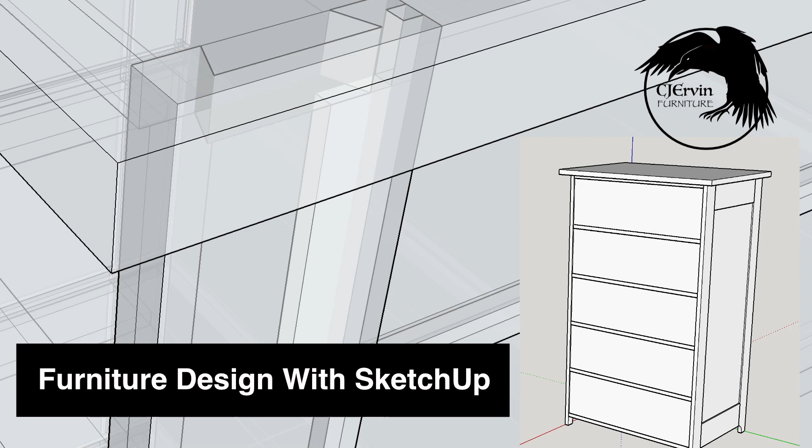So I'm getting ready to build a dresser and I thought I would share with you the design process and draw the dresser from start to finish using SketchUp so that you can see at least my thought process in designing furniture and some of the ways you could use SketchUp to make your designs buildable or to determine if your designs will actually come together. I think it's a great tool for visualization.

But before I go into laying out the dresser or chest of drawers we're going to build, I wanted to talk a little bit about ways you can build it. Firstly, here's my preferred method, where you have legs that go all the way up. They form the core structure of the carcass. In between the legs is a panel and frame assembly, and typically there's either two raised panels or one sometimes, or two flat panels. This is the 90 percentile where I go for my design. It's tried and true. It's all really strong, and it works equally well for less ornate pieces. Here it is without a raised panel.

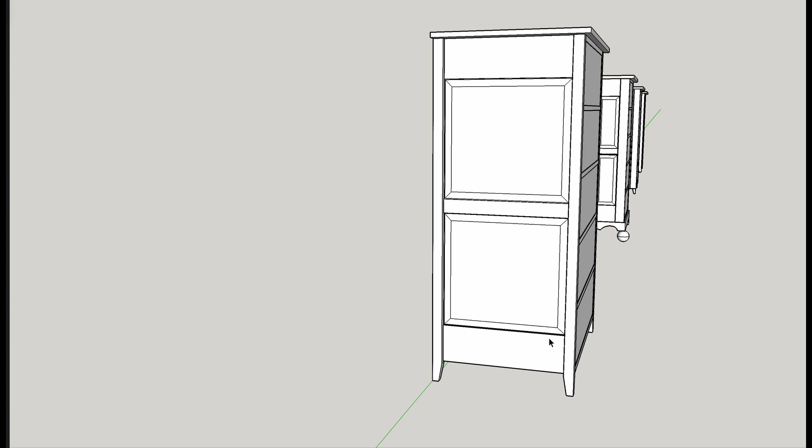Great product, great structure. Ultimately, you can also ditch the stiles. If you've got the legs that go all the way up, you can say, no, I don't need the stiles, it's wasted work. So here, the rails for the panel and frame, the legs become the stiles instead of an extension of the stiles. And it works equally well for an ornate sort of look. And you saw some of this in the later arts and crafts or mission style work where they adopted the leg as stile.

Alternatively, you can just say, I'm going to go with no legs and all stile. Now in this Gothic look, you've got to build a base. It's got to sit on something. There's got to be something to get it up off the ground. And forgive my little frou-frou here, I just threw that in so you would recognize that style. We've all seen pieces that are very similar that use the base because they've gotten rid of the legs as stiles or stile extensions. Now it doesn't have to be ornate. You can do this in a more subdued way where you've got a very minor leg, but it's still a more ornate look.

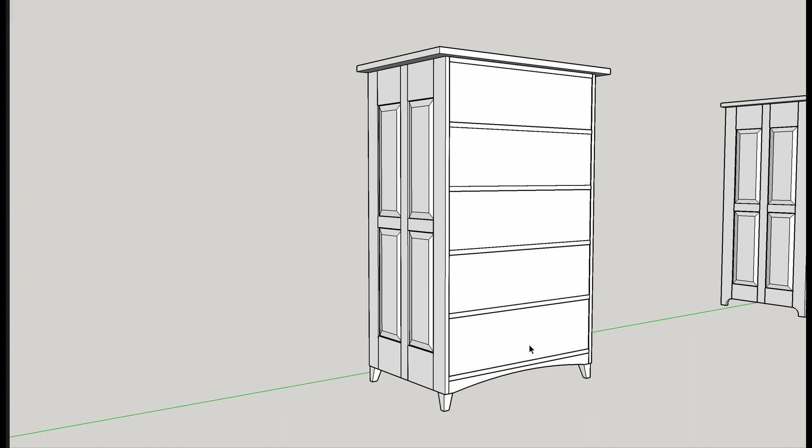Now, alternatively, the Art Deco folks came along and said, we don't need a base, we don't need legs as part of the stiles. We can simply have legs attached to the casework. And so what you'll see here, I'm going to turn this upside down a little bit, is they simply extend the stiles. And they extend the stiles and the bottom rail to form a bit of an apron where you can then get a leg anchored securely and it butts up against a drawer web. Not a bad way of doing it, and it's also effective in a very plain look.

Me personally, if you're going to go that minimalistic, you can sort of go back to the stile becomes the leg, and that's also very simplistic. It's also easy to build. It doesn't look as good in an ornate setting, but look at it in a simple setting, and now you have sort of the classic mission or arts and crafts look. And this was the sort of beginning way, I guess, that Stickley and competitors built their furniture. They just said, hey, it's a simple design. We'll take the stiles all the way down.

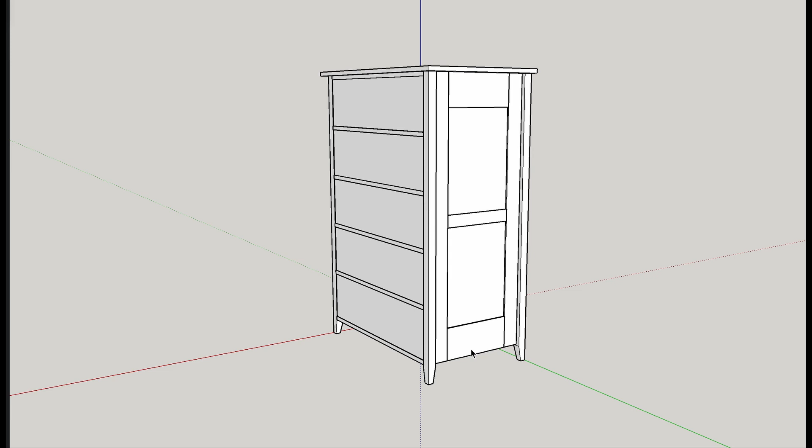Now, why would you choose one of these over the other? Well, a lot of it depends on what you're trying to do or the rest of the pieces. I mean, if you've got a curved front, if you are wanting to elevate the piece, a lot of design decisions come down to what is your artistic flair and what the wood is. Now, in my case, if I was using something like white oak, which is really one of my favorite species, I would really go with something like this because there's enough complexity in the piece that it's going to balance with the very micro complexity of the white oak, and it's going to be very harmonious.

If you're using something that is really simple like cherry with limited complexity in the wood, or maple, you can go really ornate so that you're not over competing with the wood. Now in my case, I'm going to use the gum that I used for the entry table project, and that wood is about as busy as I've ever seen. It goes from vanilla to cinnamon to rust, to chocolate and everything in between. So any of these other ways of building would compete with that wood.

So I'm going to use the stiles-become-legs method, and I'm going to use a single panel, which means I'm going to use a very large rail to give this panel structure. You could draw it split, you could do anything that suits you, but we're going to draw this particular piece of casework together, or at least I'm going to draw it, and hopefully you can watch. And I'm actually going to go as far as to draw all the joinery so you can see what the joinery looks like in a piece of casework like this. So let's get on to drawing.

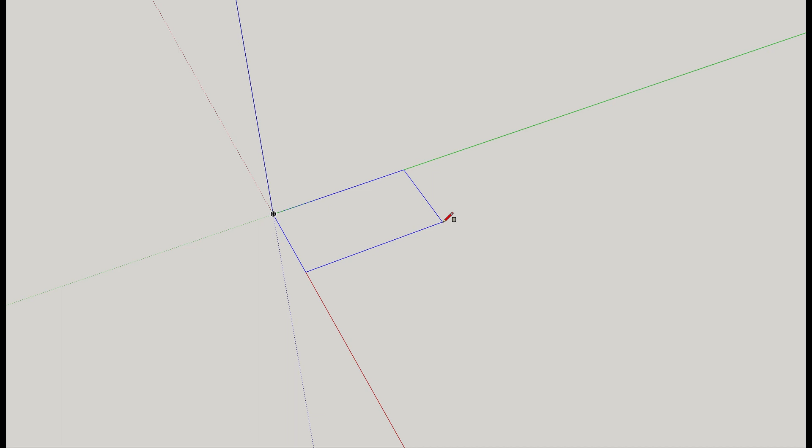I like to start with a bounding box. It's just a shape that represents the top and the bottom. In this case, I'm going to do a piece of casework that's 22 inches deep by 30 inches wide. So 22, 30 gives me a box that is the bottom. I'll make that a group so it doesn't stick to anything. And I'll use move with option to make a copy that is 54 inches tall, because that's how high I want to make the casework. So now we have two planes that represent the size that we want to make our casework.

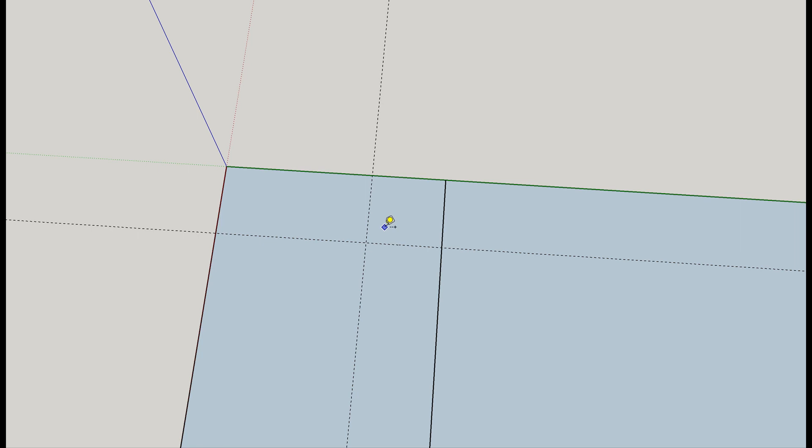So the first thing I like to make in terms of a real drawing item is the stiles. So we'll come into the corner, we'll draw our stile, and we'll make it a 3-inch stile by 3/4 inches. Now if we look into our stile, we need a cutout in the back for our plywood back if you use it. Easy way to do that is we'll get the tape tool, we'll come in a 1/4 inch, we'll come in a 1/4 inch, and that shows us the size of the notch, so we'll draw that in. That means we don't need these lines.

And we can extrude that on up. So we'll select it, we'll push pull, and we'll push it 54 inches up to the top, because we know that's the top because we moved it up that high. So our first stile is ready. Now we need to go ahead and decide how high we're going to make the rail, because the rail is above the bottom, leaves us room. So using the tape measure, we'll come up 2 inches and strike a line. That way we've got a point to go ahead and make our arc.

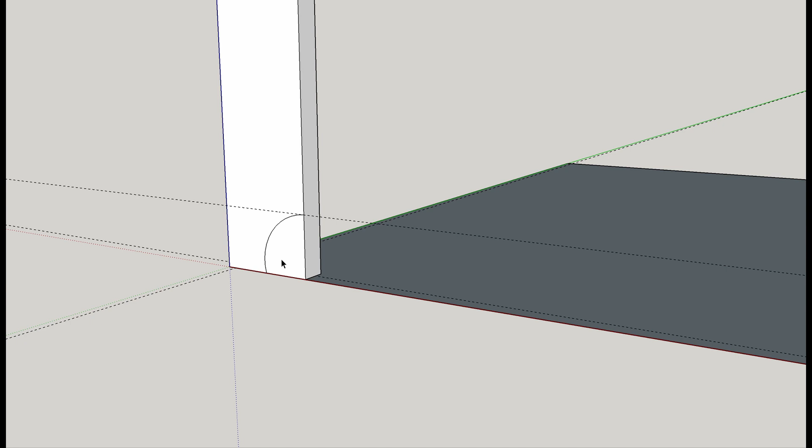Now to make the arc, there's several arc tools. This is the one that I prefer. You pick your top point, you pick your bottom point. I'll wait for the tangent, and I'll wait for the tangent. So now we've got an arc, and we can use push-pull to get rid of that. So we have one stile. Now we do need a groove along this edge. Now we can't cut that groove through because it'll stop when it hits this arc. And we don't want it to go all the way through anyway.

So I'm going to come up a 1/4 inch. That's a 1/4. I'm going to come in a 1/4, in a 1/4, and I'm going to draw that rectangle the whole way through. I'll go all the way through the top. I've got to do a lot of moving around. We'll go to right there. We'll use a push-pull. We'll push that in, again, 1/4 inch so that we have our slot for our panel. That looks good. Now let's get rid of the guides for the time being.

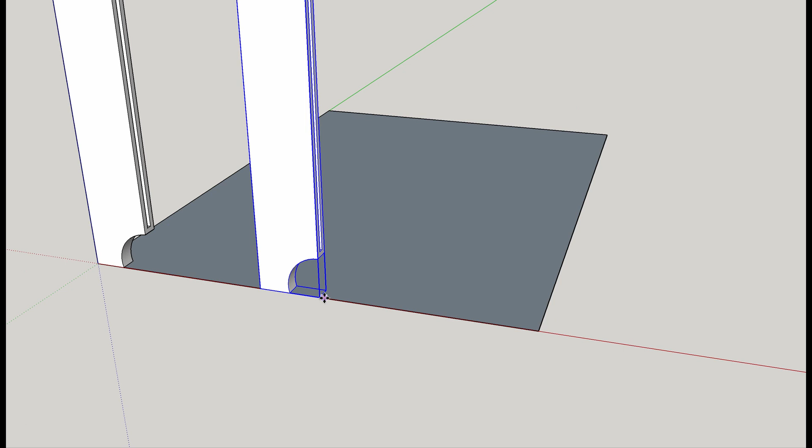We'll select all of that, make it a group. And now I'm going to move it with Option to copy on this edge. Of course, you can't see what I'm doing. Let's get back in here. I'm going to move it to that edge. And I went a little far. All right, let me get that corner. There we go. Now it's facing the wrong way, but while we have the Move tool selected, we can come up here, rotate it 90 degrees, and we'll pop down to the bottom and make sure it's aligned correctly. And it isn't.

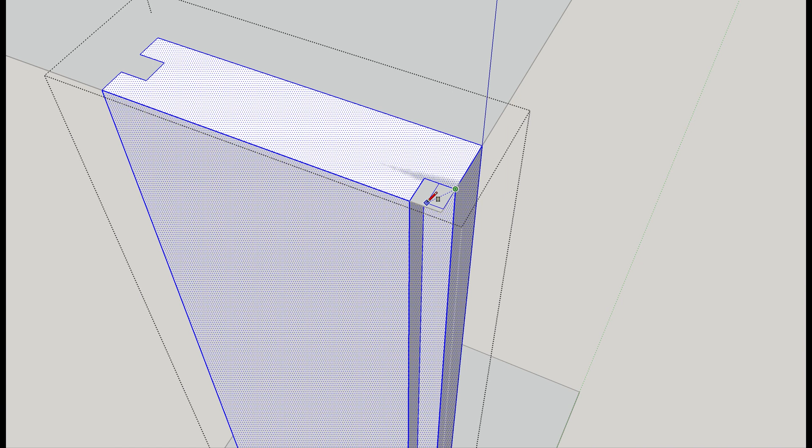Now we don't need the slot in the front. Should have left that in until I got it done, but that's okay. We'll close it in. And we'll just close it in with the push-pull tool. Whee! That takes care of that. Now we've got some extraneous geometry that leaves. And we don't like extraneous geometry.

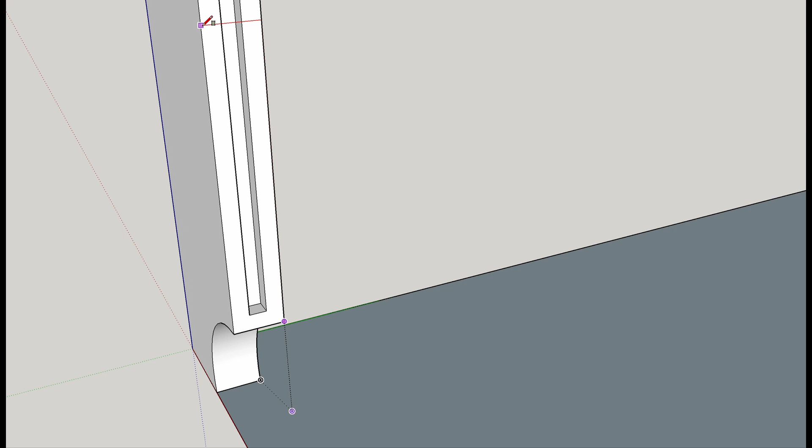So now we have two stiles, and let's go ahead and put in a rail. A rail is simply a rectangle drawn on the face, and I like a 5-inch rail. On big panels, I like thicker rails than stiles because you need the tenon and glue surface. So we'll make this 5 by 3/4, and we can push it across to that surface there. I'll put the slot in it before I copy it. So another rectangle, and we've already got the points here. That one.

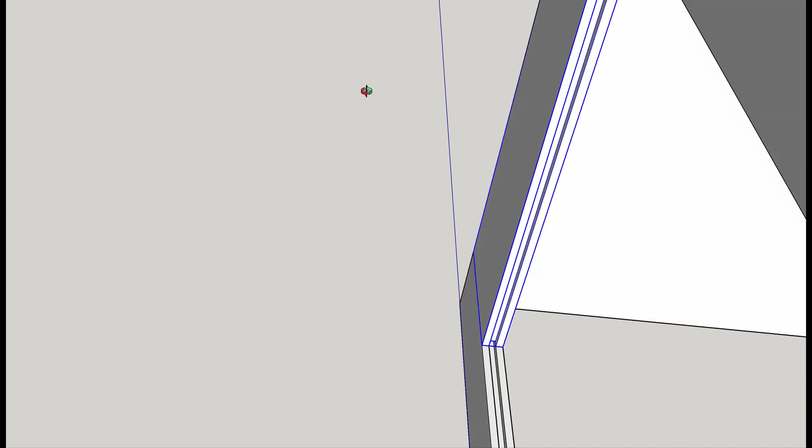Over to here. Push pull, go down 1/4 inch. Make this a group. Now we'll move it up. Option to copy. Sure I'm at the corner. That's it. Now it is upside down. We could rotate it, but we'll simply select it and do flip along the blue. So what that did is it moved the slot to the bottom.

All right, now we need a panel. And the panel is the size of this opening plus 1/4 inch on each side. The easiest way to draw that is going to be to hide the two stiles, and we'll draw another rectangle using the rail as a guide. Right there, and we'll do push-pull. And before we drag it all the way up, we know the sides need to come out a 1/4 inch to fit inside the stiles, so 1/4. And we'll do the same thing on the other side.

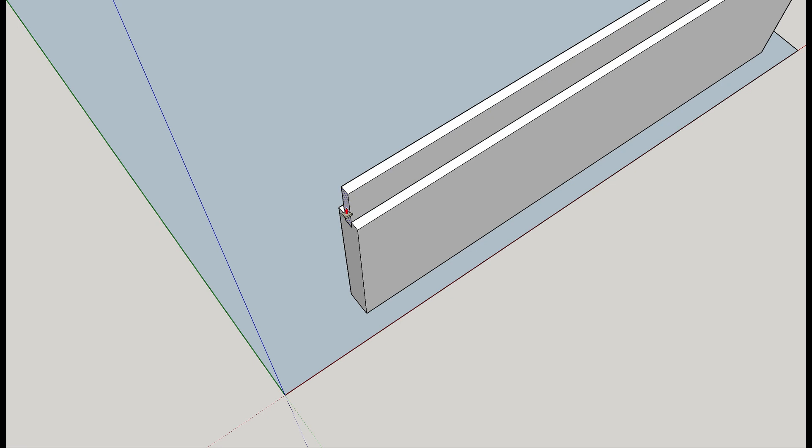There, now we'll view hidden geometry, and we'll unhide. Now we can pull this thing all the way up. Got to keep moving around. Now we need to take it to this point and then a 1/4 inch more. So we'll hide this and we'll come in here, select 1/4 inch, and that takes it inside that slot. And we'll unhide. So in very short order, we have a panel,

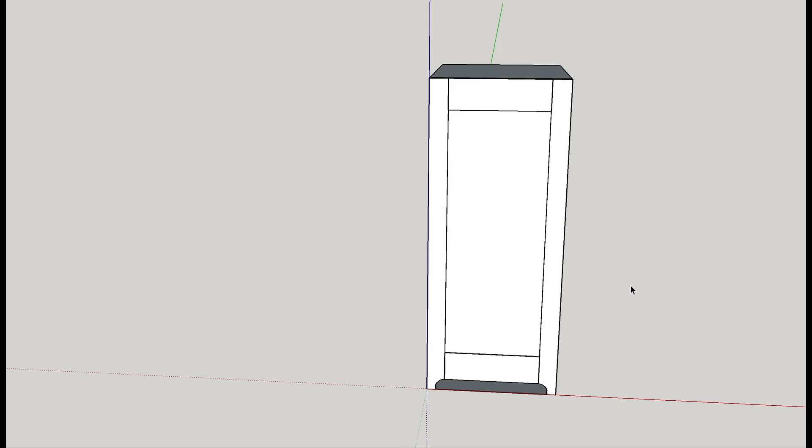and I'm going to make a group out of the center. Then I'm going to select it all, shift, shift, make sure I've got the center panel, and I'm going to make it a component, and we'll call it side. Now I'm going to use the move tool again to move a copy over. So M for move, option for copy. I'm going to drag the inside to become the outside.

Now we have a problem if we start drawing on it now, in that this outside is this inside. So we need to turn this one inside out. We can do that by flip on green. You see the green axis running along here, so we're going to flip it on the green. So now we have flipped it to where we've got inside to inside, outside is on the outside. So when we start drawing joinery on this inside, it will show up over here. Now we don't need these anymore because we've now established our own bounding box.

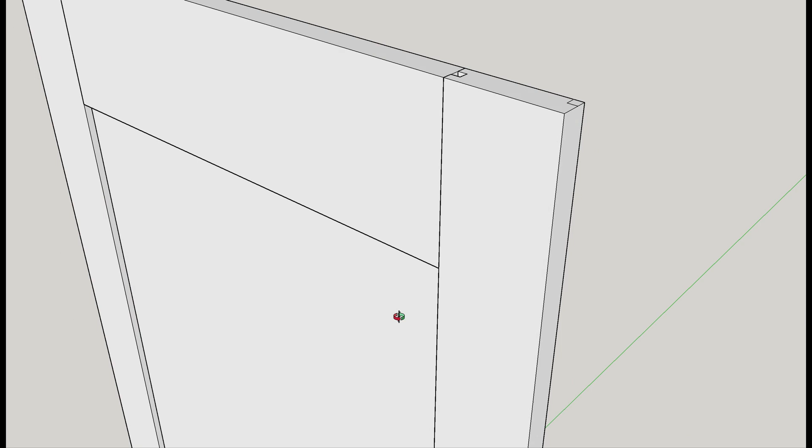So it's time to draw some drawer webs, and to do that we've got to determine how far they come. You could make them flush. I like the shadow line that is made by having them set back a small amount. And so, got a little bit of stray geometry here still. I didn't clean up the top. Take care of that. Anyway, on drawer webs, I set mine back 1/8 of an inch. So I'll go ahead and mark 1/8 of an inch, and I'll turn on guides so we can see that. So that's where our drawer web will end on the front, and on the back, the drawer web will end flush with where the plywood back mounts.

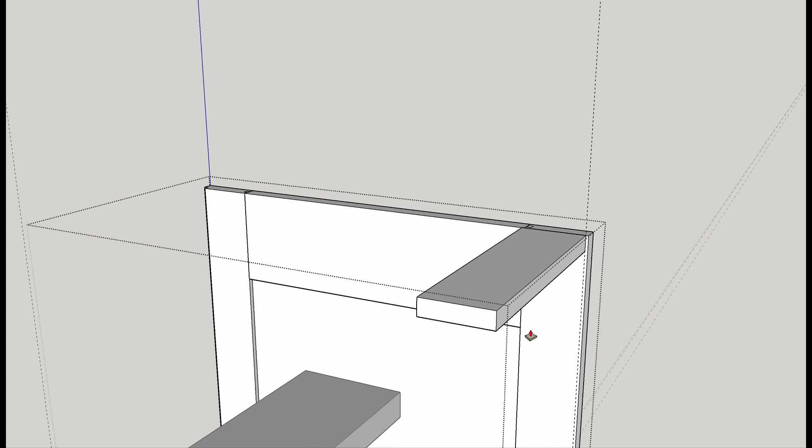So a drawer web starts its life as a rectangle on a face, and it's on the front. And I will go 3 inches by 3/4. Now I can pull that across. Hold on, I was editing that component, and I don't want to be. Now we're back to where we want to be. Rectangle. 3 by 3/4. Pull it across to this face right here. There we go. Let's get back in the middle where you can see; it's very hard to draw with this very small window that screen recording gives you.

We'll make that a group,

And there's Django. Every video.

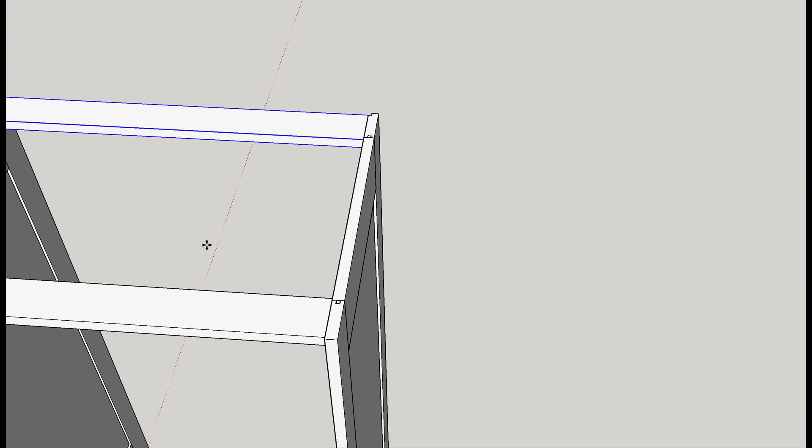I'm going to turn off guides, and I'm going to move, Option, grab the corner, and go to right there. All right, now we will draw the other one. So rectangle, and again that's 3 by 3/4. Oh, did it wrong. There we go. We'll push this out. Make it a group.

Move, Option to copy. Grab the inside face. It becomes the outside. So now we have an 1/8 inch reveal on the drawer web and a 1/4 inch reveal on the back for the plywood. Looks good. Now let's make all of this a component.

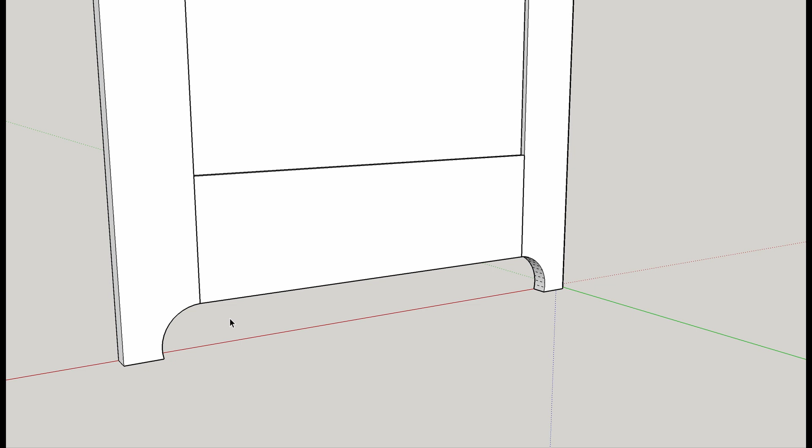And we need to copy them down as far as we dare, so let's get a line set up for us. Tape, we'll go right there and show guides. So we will copy it down to that intersection of our reveal and our level line with the rail. So move, Option copy, grab the bottom, right there. Click, and I'll do /5 on the keyboard. And unless I mess up, that should give me 5 of them, equally spaced.

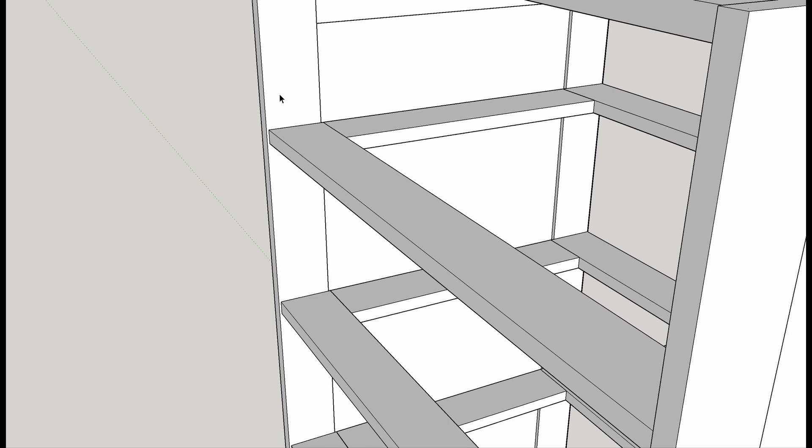So that takes care of the drawer webs. Turn off the guides. And now we'll draw some drawers. All right, drawers are pretty simple boxes, especially since we've already laid out what we want. We'll turn on guides, and we have our existing 1/8 inch reveal. So we'll come back another 1/8 inch for a 1/4 total. And that'll give us a point where our drawer stops.

When I get to where we can see the inside face. There we go. And we'll put a rectangle in here. Oh, didn't quite get it right. There we go. We'll draw it up, and our drawer faces will make 3/4 inch stock. Let's see, 3/4. Can't type today. Okay, so there's our drawer face. Push pull. We'll come back to that surface right there. And now that we have a drawer face, we'll make it a group. And we've got to draw the back before we can join them.

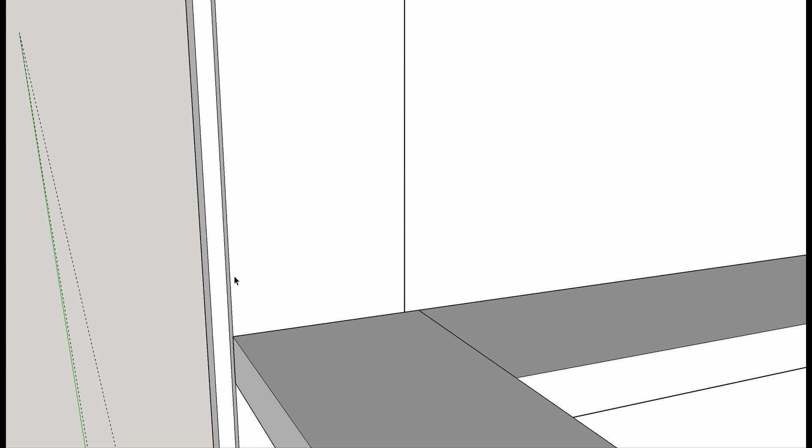The back, I don't like drawers pressed firm against the back, so I'll come up 1/4 again and do a rectangle. Back and sides, I make 1/2 inch, so 1/2 size. I'll pull this out. Get stuck in the model periodically, but that's okay. I went too far. We want to land right on that guy. There we go. I'll make him a group.

Now we got to draw the sides, and since we know where the top is, we can go ahead and hide the... I'll turn off the guides, make it easy to see. Sides are just another rectangle. It helps to select the plane you want to be on, rectangle. Again, we'll make them 1/2 inch stock. And we'll do push-pull. And we'll push it back to this side here. And we'll make it a group. And we will move it using Option to copy over to this side.

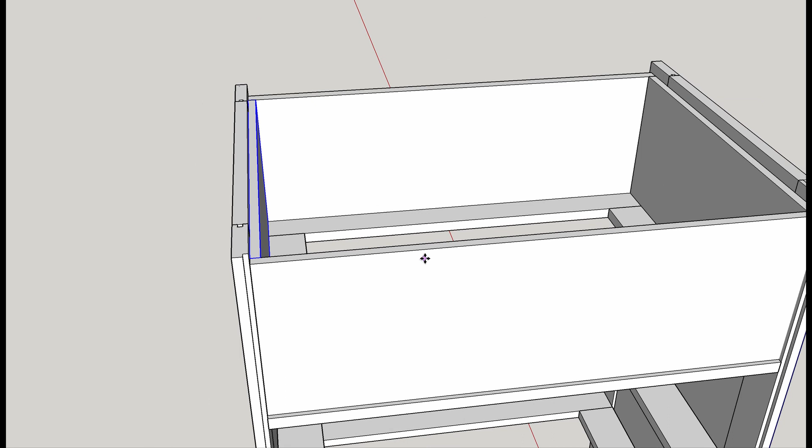Now we ought to put a bottom in, and to do that I will make it to where we can see what we're doing here. Let's hide this guy. That was the back, so we'll come in and view guides. 1/4 inch, 1/4 inch, so it's 1/4 inch up, 1/4 inch bottom. But let's go ahead and cut it out first. So to cut it, we'll go ahead and hide the side. So there's our mark. And we'll make a rectangle here to cut out.

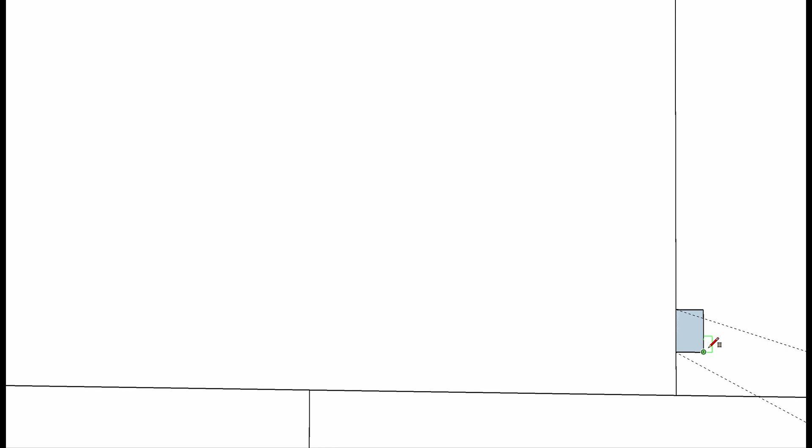We do push-pull. Actually, nope, can't do that. I've got to be editing that component. And I'll hit it so it inferences. And just to double check, I'll do a tape for 1/4 inch, because I don't think it did it right. That's better. Get rid of that.

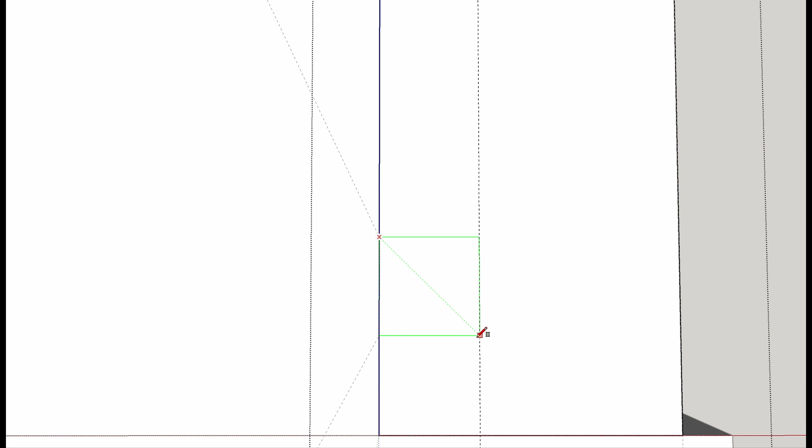That's better. Push-pull. Now this will be hard to do, but we'll push it in and we'll come get it from the other side. Actually, we can do it easier by hiding him. And him. And away we go. So he's done. And we'll view hidden items, and we'll unhide the drawer side.

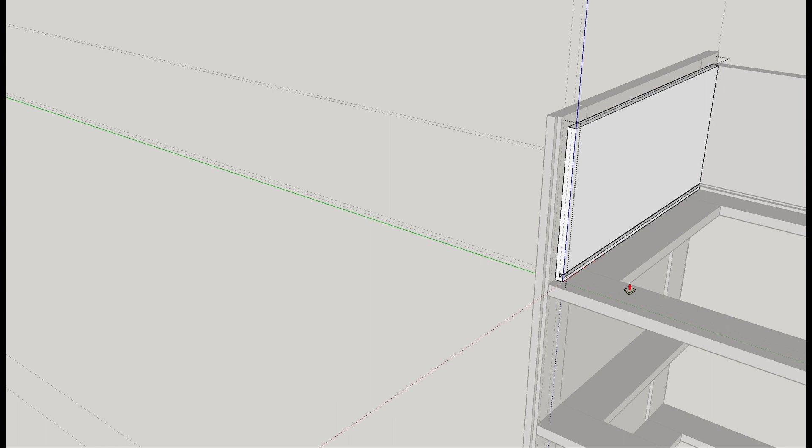And we'll do the same thing. So tape, 1/4, 1/4, 1/4. I'm going to edit, rectangle, push-pull. There, he's gone. All right, now we can simply reuse him. We'll view hidden. We'll unhide. Unhide. So we made a groove on the front and the one side. So we'll just delete him.

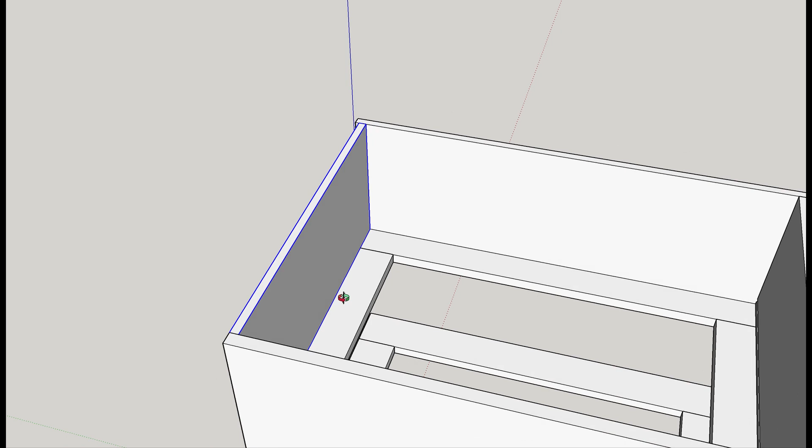And we'll move him over since he's got a groove on him. And there's the front. Turn off guides. So he's got a groove on the wrong side, but that's not a big deal. We'll take him and flip him along the green axis. So now his groove's on the right side. And we can do the same thing for the back. Delete. Grab him, move, Option, take the outside face and put it in. And this is the red axis, so flip along red axis. That groove comes in.

Now the one thing we do need to do is shorten this. We copied a 3/4 inch piece, and it's 1/2 inch for the back and the side, so we'll shorten it. Oops, I'm sorry, it should have been 1/4. Can't type tonight. All right, so there is a drawer. Now before we get too far afield, let's go ahead and make a bottom.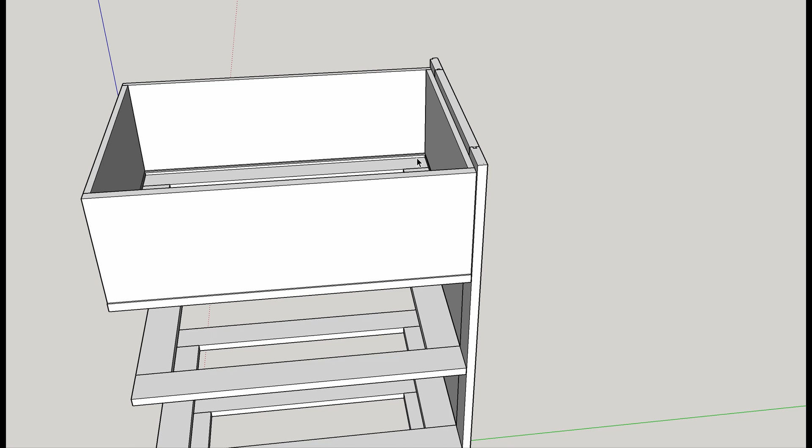Easiest way to do that, I will hide... we'll just use this trough as a guide. Make a rectangle. I want to be sure I get in, can't go too far. Push, pull. There we go. Now I need to bring these sides out 1/4 to fit in the groove on the front and back. And zoom out. 1/4. And now I'll bring him all the way across to mate with his partner on the other side. So he's in the slot.

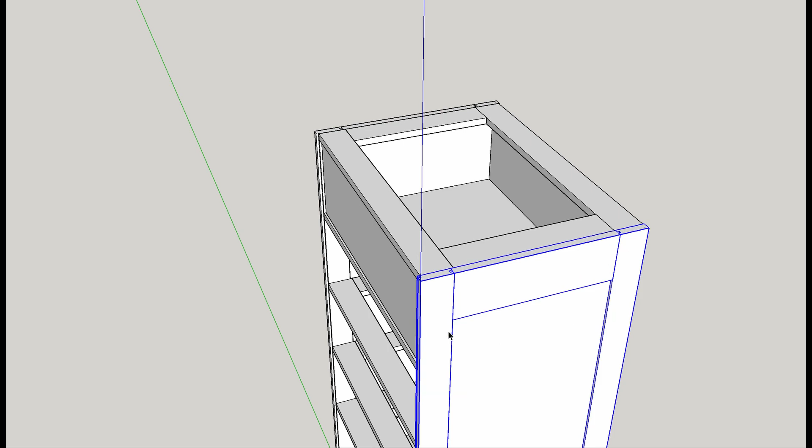And we will now unhide the other parts of the drawer. Might as well unhide the web and unhide the other side. So now we have a drawer that is functionally correct. We'll make a group out of the bottom. And we will select all parts of the drawer, and we'll make a component.

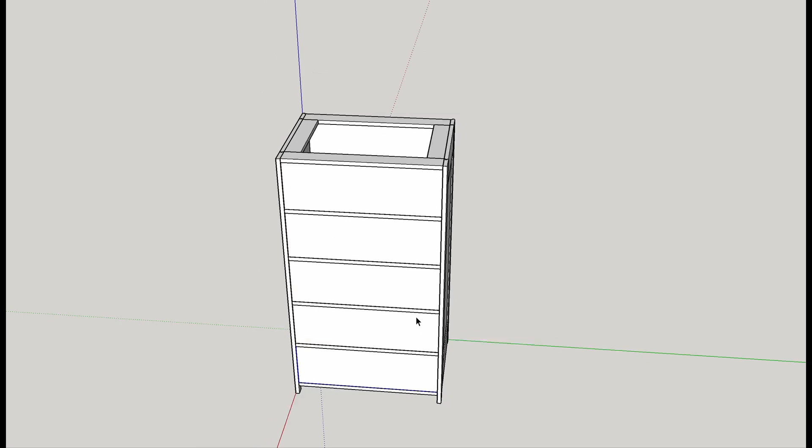Now we need to make more of them, so we'll use move, option, grab the corner, and we'll come down, and I'm going to hold down the blue, and then I'll do /4. So that's 4 drawers. Get where we can see. So we have 4 drawers, 5 drawer webs, 2 sides.

Next thing we need is a top, and then we can draw some joinery. Top's easy, it's a rectangle. Just go corner to corner. I'm going to pull it up 1 inch. Now we have to give ourselves an overhang, so I'm going to go 1 inch, and I'll make the top a group. So that is the functional point of the chest of drawers.

Now, if I were building it, I would stop here because that's enough for me to sort of take it and run with it, because most of the joinery I do on the fly and say, okay, I'm making this, I need to make it bigger. But let's go ahead and draw it so we can actually see what it's like and how you can do some joinery with SketchUp. Now, I will say there's a couple different tools that I'm going to use, some of which you may not have, may not want, but I'm going to show you a workaround where you can do it manually. So we're going to do joinery.

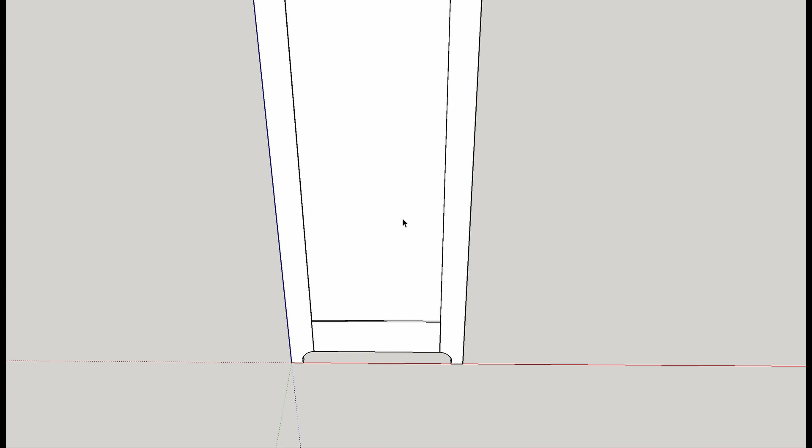For the sake of what we're going to do, we don't need the drawers or the top, so we'll hide those because all our joinery is going to be restricted to the casework. Now, I should forewarn you, when we're doing the joinery, I'll probably end up deleting a lot of pieces that we made, because if I put the joinery into this rail, I'll simply be able to copy it down to the bottom rail and then flip it. We did need to draw it in place earlier, so we got all the positioning of everything we needed.

We'll start with an easy bit, which are the horizontal dovetails that hold the top drawer web in place. Before we do that, though, since this top drawer web is different than all the others that have either sliding dovetails or stopped dados, we'll make this one unique so that our work that we do on this one isn't reproduced to all the others. So the first thing we'll do is we'll give ourselves a margin to go by. We'll go in 1/4 inch. I better turn guides back on.

And we will get to where we are working on this piece, and we'll decide what we want as a dovetail, and we'll just draw it in with a line. Again, this is not a show joint, it's a structure joint. So we want to stay far enough away from this edge that we don't run the risk of cracking it. So we'll come in that far, and we'll go something like that. And then the same can be said for this haunch tenon. We'll come in this far, look for a similar angle, and then we'll connect them. And that works. Not symmetrical, but it'll hold it in.

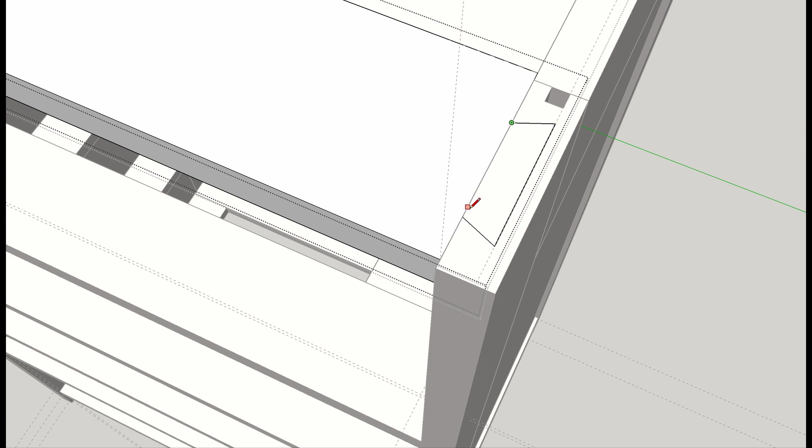Now this piece, we will go ahead and make a copy of it for the other side for now. And it's on, but we need to flip it. So we will flip it along the green axis, I believe. And now we'll move it over. Of course, it's not happy. And we'll get it in the right place. And we'll delete one we had to leave behind to make it work. Oh no, Command Z, Control Z.

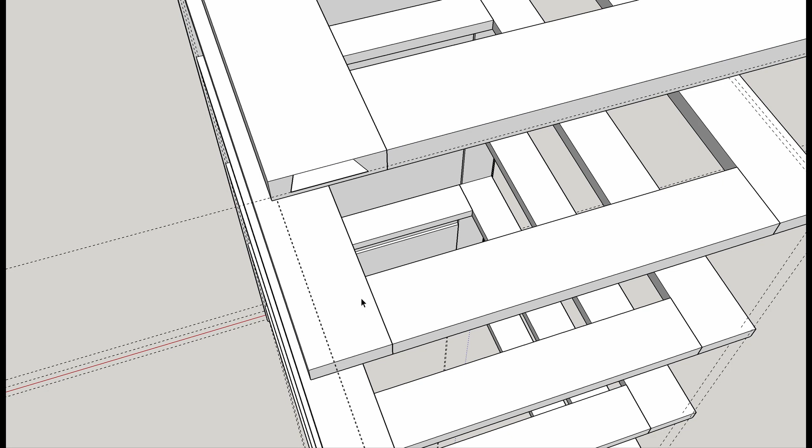So the next step is to extrude that dovetail, and we can easily do that by hiding the panel, and I gotta rotate it, so we just extrude it. I got to get back in the right context. Down to here. And we'll go look at the other side. We'll hide that. And we'll extrude that. And we'll get rid of the extraneous line.

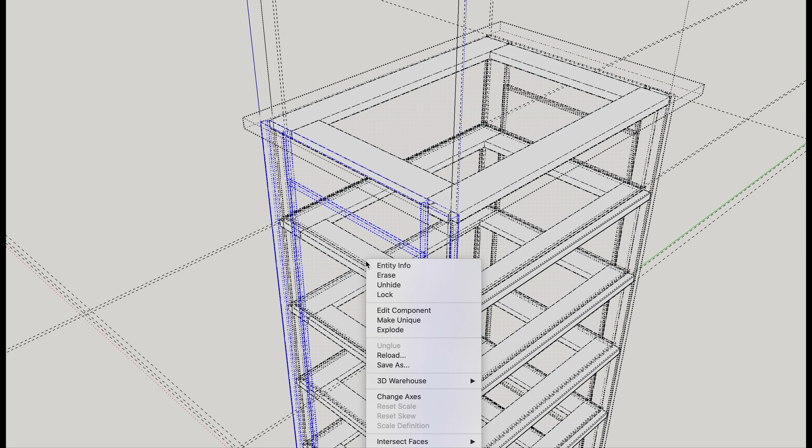So now we've drawn our dovetail portion, and we'll view our hidden items. And we'll unhide. And we'll unhide. We'll turn off guides for the time being. All right, so we've drawn the dovetail, and now we need to cut the stile to make it fit. Now I'll show you the manual way. The manual way is we select the element, we go into edit mode, and we'll just trace it.

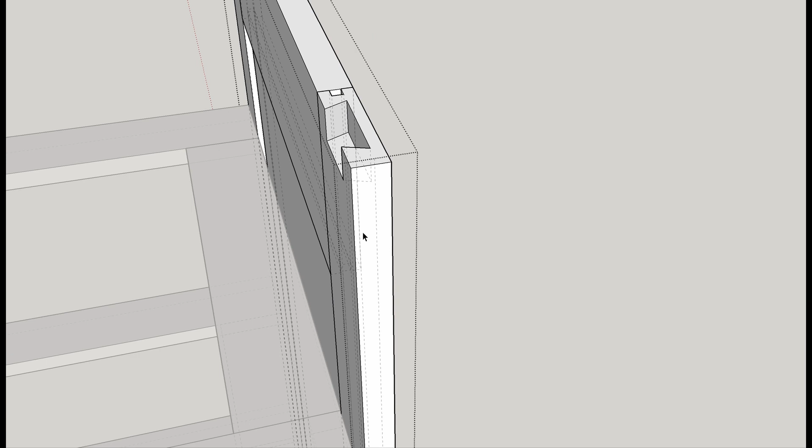Now we'll hide this. And we know our stock is 3/4, so we can just push it down 3/4 of an inch. And now we'll find out if I positioned the other one correctly, and I don't think I did. So we did the cutout. Let's view our hidden. And unhide. No, I did get it right. Good, spot on.

Now how do you know that worked? Well, take a look at X-ray mode. So we have our joinery in. We are well away from where that haunch tenon is going to come. That looks good. So let's leave X-ray mode.

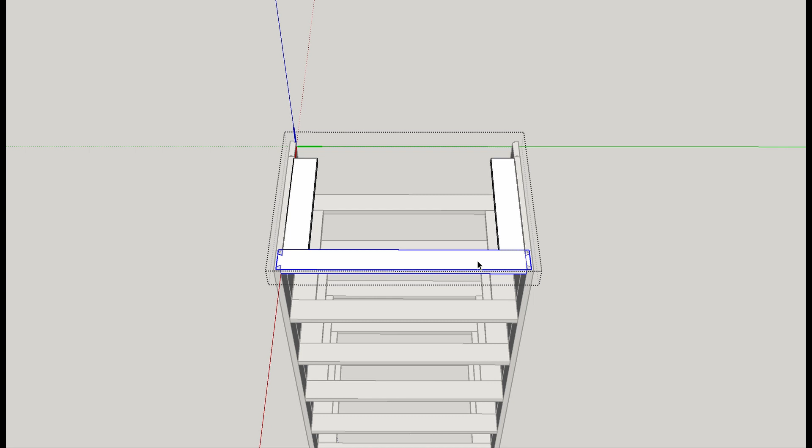Now we need to do the same thing on the back of the drawer web, and here's where we'll cheat. Since we've already drawn this one, we'll go into this item, we'll delete that, we'll take this one, move, option to copy, we'll drag the inside face over here, and now we'll simply evaluate how we want to change it. Well, it looks like we didn't get much from the move. If we do it here, we're really too close to where this haunch tenon is going to come up. Oh well, nothing ventured, nothing gained. So we'll go ahead and undo that.

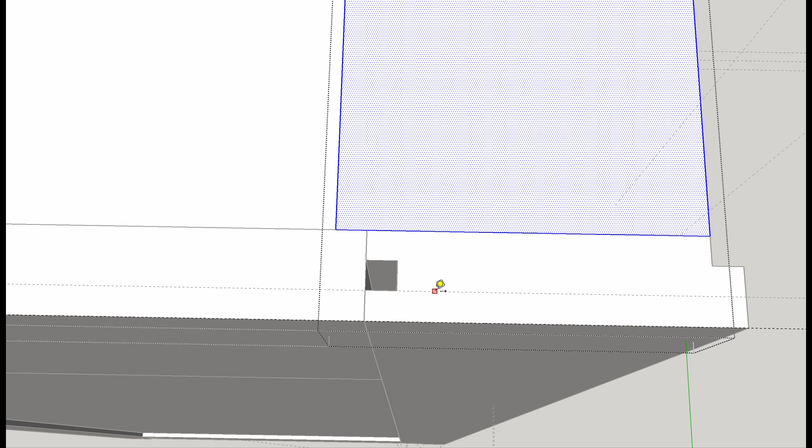So we'll draw a different one here. We'll get into the context of editing that one. We'll get a line, and we'll come well away from the haunch tenon. So I need a tape. Come over 3/4 of an inch, so that looks fine. And we'll come well away from the slide. And that works. So we can hide this side. Same thing, we will extrude it with push-pull. Got to get into the context.

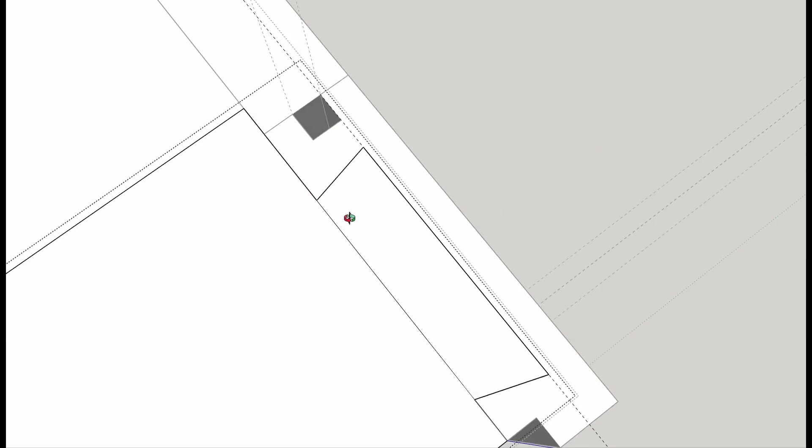And we'll do the other side. No sense copying it. I think it takes more keystrokes to copy it. We'll just draw what we want here. Grab our line tool. We do need a tape. We want to go out a 1/2 inch, come well away from the haunch, come in, come well away from the end and come in. We'll connect them. And now we'll hide the side. And we'll extrude this down. So that gives us both. We got an extraneous line. Get rid of that. We'll get rid of that.

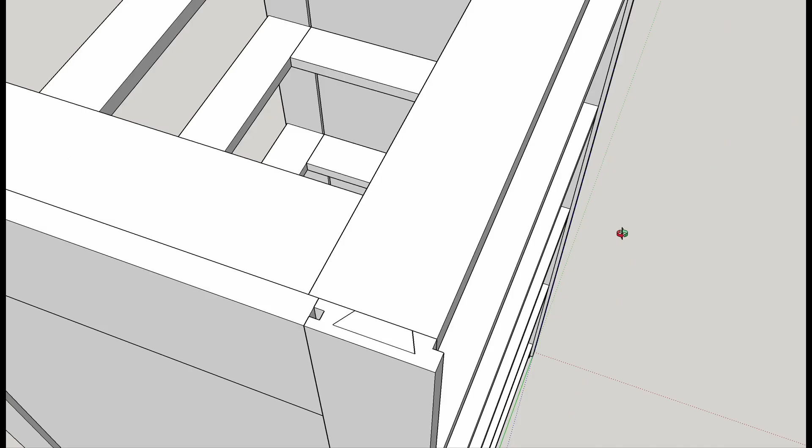Now we'll make the offsetting cuts in our sides. So we'll show our hidden, unhide, unhide, and don't show our hidden anymore, and we'll turn off guides so we can see what we're doing. Now it was the back we already cut, so now we've got to work on the front. So I'll get into edit mode for this piece, and I'm going to trace what we need to cut. I'm going to do the same thing for the other side. Well, that should already be drawn. I think it was the back we already did. Yeah, this is one we haven't done.

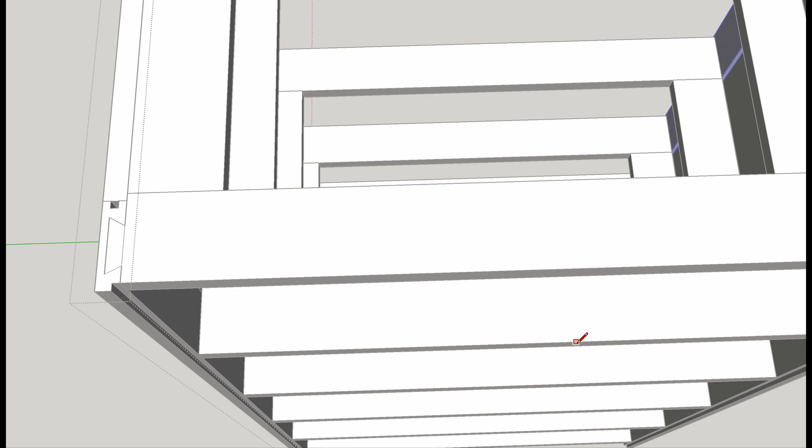And I was mistaken to have copied it, because it needs to be identical, because when we make the cut, it's going to cut them both. So what we'll do is we'll get rid of this one. Let's make sure this is the one that we need to get rid of. Yep, we haven't cut this one yet. So I'll get rid of him, or at least hide him, and I'll undo this one. That's perfect. It's so hard to keep this in the view that you all can see. Get rid of him, and we'll grab the eraser tool.

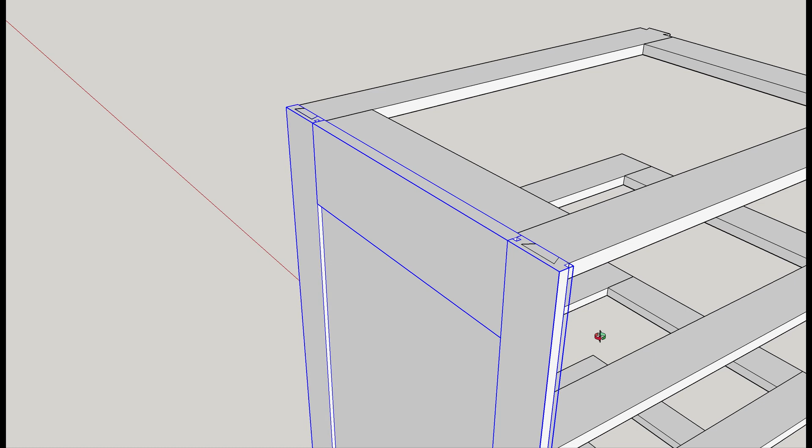Perfect. Now why do we do that? Well, when we cut this side of the stile, it's going to cut the other side, and then we'll simply make the dovetail to match the cut we make, because they have to be identical. And speaking of that, we'll go ahead and draw it. And that works. Hide that. And we can push this down if we get in edit mode, 3/4 of an inch. And that should have done the other side as well. Let me get rid of this line we put when we weren't in the right context. Now if we view hidden, select the other side, unhide, we now have the cut on the other side, which is why we had to undo it.

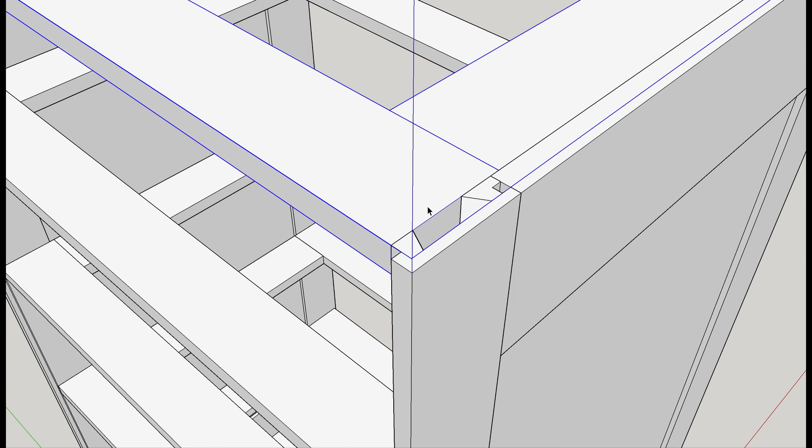So let's put our drawer web back in. Now if we go into edit mode, we're going to do the reverse. We'll go into edit mode for him, and we'll trace the hole. And now we'll simply extrude that. Hide. Go to edit mode.

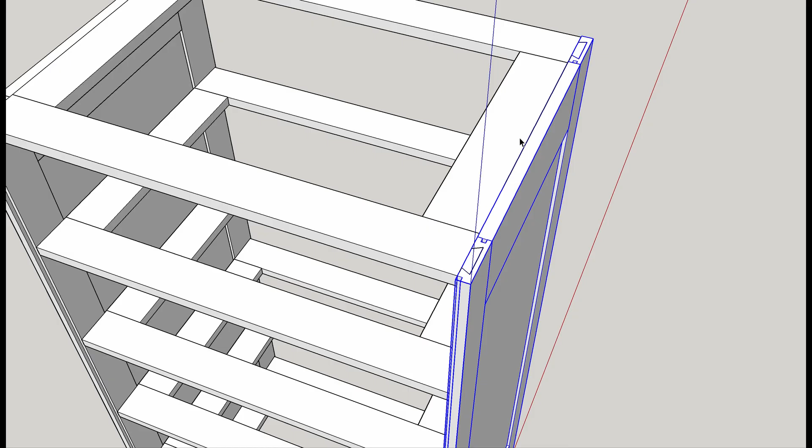And we'll pull it down. And we'll get rid of our extraneous geometry. All right, view hidden. Get our side panel. So that does all of the top web joinery.

Now we'll tackle the lower webs, and it will go a lot faster because they are all identical, and we will be able to gang process all of them just by working on one. And then we will tackle the haunched mortise and tenon in the stile and rail right there.

With the stop dados, the bottom 5 web frames are all identical, so we really only have to draw one. You could do this with a through dovetail that would be very similar to here, except rotated and coming forward. But let's go ahead and hide a side, and we'll draw the elements that we need. Now this is the side with the dado for the back, so this is the back.

For the back, it doesn't matter, there is no stop, so the whole thing has to be able to slide in. So the back is all the way through. So we'll go ahead and pick one at random and edit it, and we'll pull this out 1/4 inch. And so that will be what sits in the dado slot that is cut in the rear stile. And now they all got pulled out just fine.

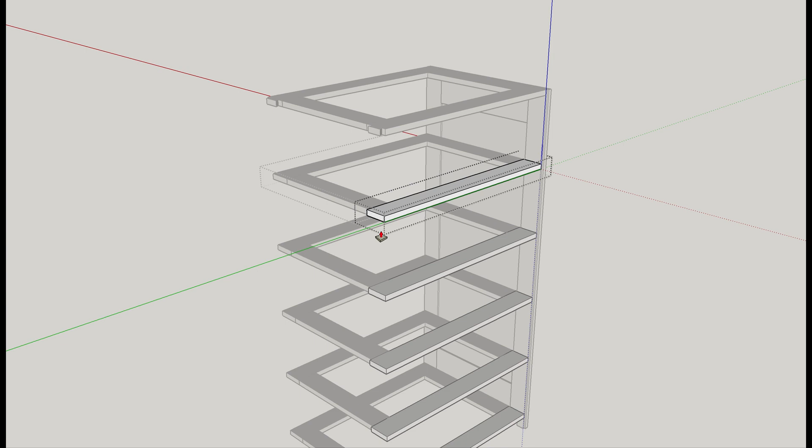The fronts, however, have a stop dado, doesn't go all the way through, so we need to make a mark, and we'll go 1/4 inch, and I'll turn on guides. So we'll need a line, and we'll pull this out 1/4 inch. So now this dado will stop before it hits the face.

Now we can't go deeper than 1/4 inch because if you remember, we've got a 3/4 inch stock for the stiles and rails and a 1/4 inch panel. Even if it's a raised panel, it would still only have 1/4 inch of space on the inside, and to be able to slide it through then, that's as far as we can make it come out. That takes care of one side. We'll go take care of the other side.

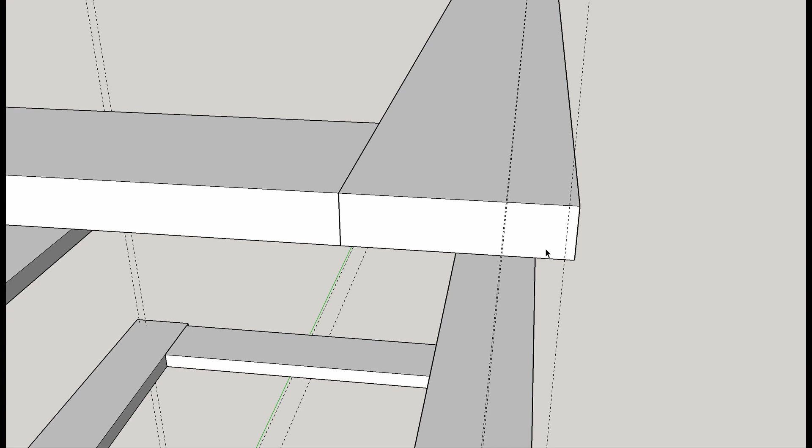We'll hide that. Won't have much model left before too long. And let's be sure we get it right. This is the front. So we'll come here with tape. Let's get in the context first. We'll come back 1/4 inch. We'll draw a line. Went too far. And we'll push-pull this 1/4 inch.

And the back is easy. We just have to get into context and push-pull it 1/4 inch. So that is ultimately our finished drawer frames. Now let's put our sides back on. We'll view hidden, select that, unhide, select that side, unhide, unview hidden, and get rid of the guides.

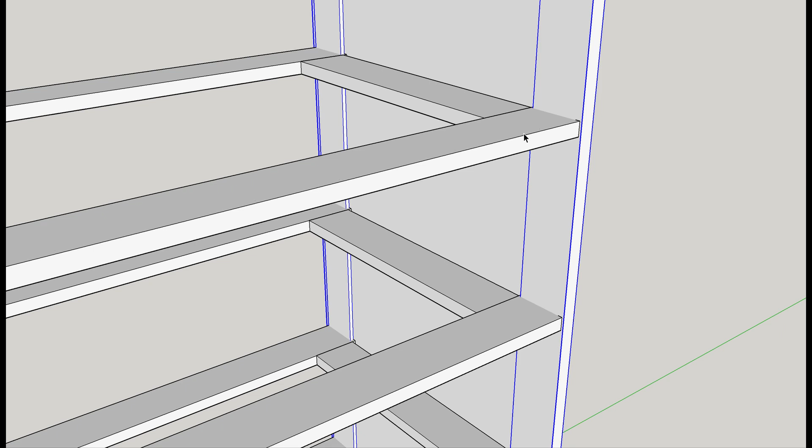So now we have to carve these holes into the stiles. Now I'm going to make one set, and then I'm going to copy them all the way down, and I'll show you what I mean by that. So let's start with a line. Let's get in the right context.

Now you could do this with intersect faces. It's a tool in SketchUp, but since these are components, so we get mirrored output, it really makes that difficult. So it's easiest just to do it this way, at least in my experience. And then I'm going to come over to the other side. And come up with a line here to here. And here to here.

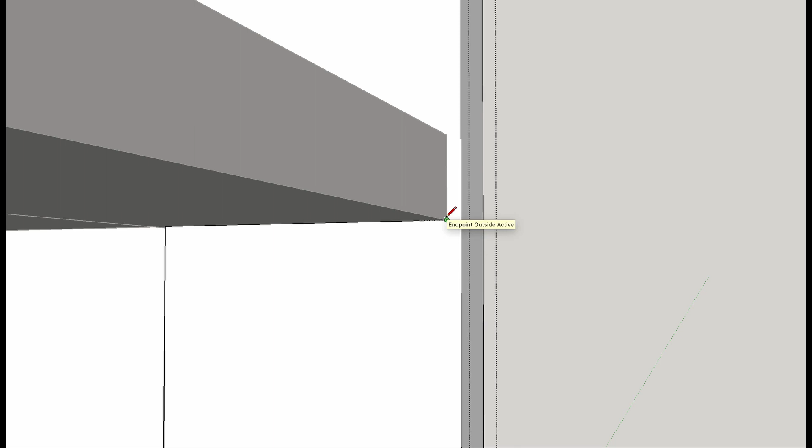Now I'm way inside the model now, so I'll come back over here. Now this line I drew on the front is not the line we want to cut to. We have to come back 1/4 inch. So let's see what that looks like if we hide that drawer web. So we'll come back 1/4 inch, and rather than doing anything complicated, we'll get in the context, and we'll do move, and we'll move it 1/4 back. There.

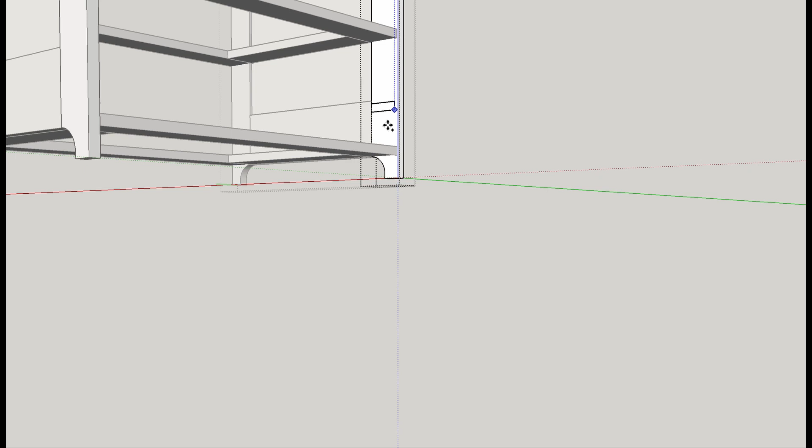Let's get out to where we can see. Now what I'm going to do is move this outline down and copy it. So I need 1, 2, 3, I need 4 of them. So let's first get it. And now we'll do move, option. I'll pick the corner. And I'll force it to be on the blue axis, and I'll hold it down, and I'll go 4.

I don't know if I did it right. Of course, we won't know until we hide these. So let's hide it and see. Yep, did it right. So now we'll copy the back one and make 4 copies. And that one didn't get drawn onto it. So I'll go ahead and draw this one onto it now that I'm in the right context.

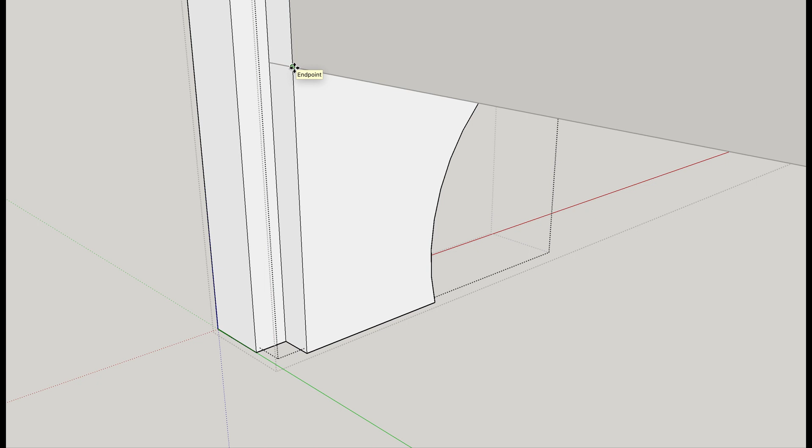There they are. They're in the component, just not the context. Now I can move these. So I'll grab the outside, move, copy. Click, and 4. So let's see what we got. Hide. Hide. Hide.

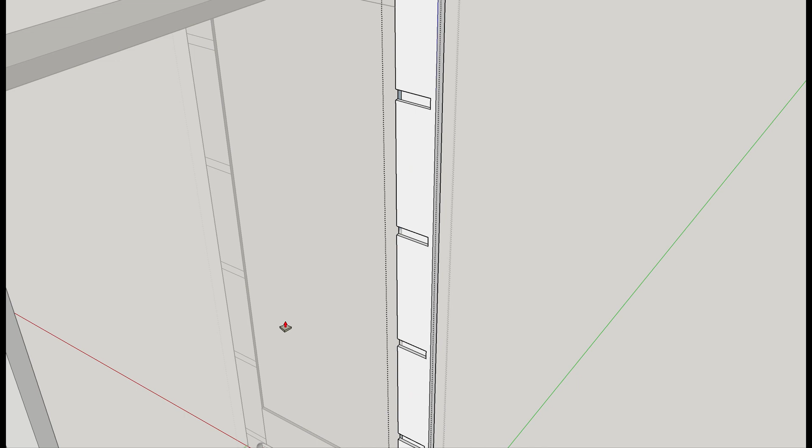So we have our one that will be a haunch. So let's go in here, for the stop dado. Let's get in context. Push pull. Push it in 1/4. And with push pull tool, if you double click, it simply does your last move. Now we'll get in context for this stile. And that should have been both of them, because remember we rotated the faces in the beginning.

So now we have the through dados on the rear stile and the stop dados on the front stile, and you can see it just cuts through to the 1/4 inch for the panel. It takes care of that. Now we'll view hidden, and we'll unhide the drawer frames. Don't know why.

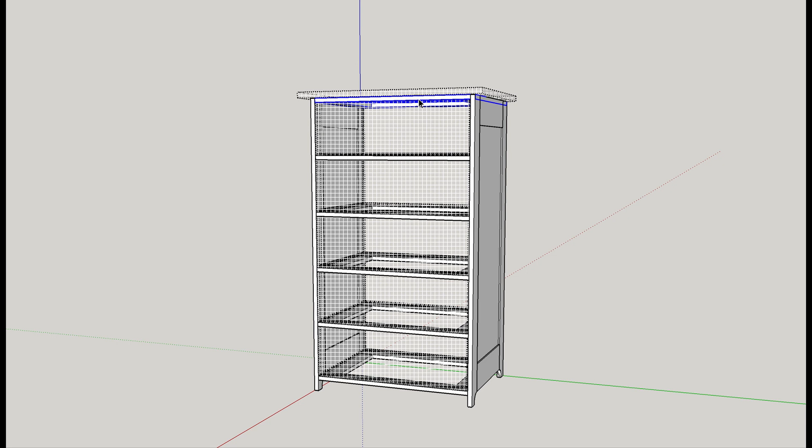All right, so next up, and the last joinery, will be the haunched mortise and tenons in here. And for that one is the one I am going to use a plugin for, because it is a bit complex. All right, let's tackle this last bit of joinery, and that is the haunched mortise and tenon in the rails. To make that easy to start with, we'll go into this component. We'll hide each of the stiles, and we'll take a look at what we have. And I'll go ahead and hide the drawer web as well.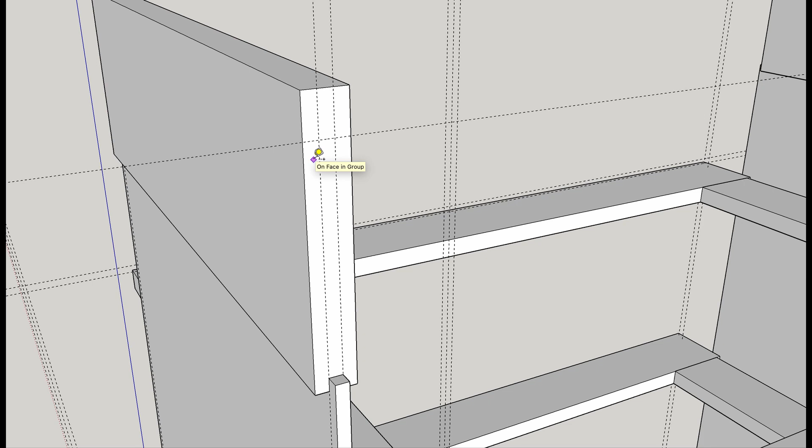Now this one's pretty straightforward. It's easy to draw. The tenon will come in 1/4, turn on guides, come in another 1/4, and this will be our tenon. We're going to come down 3/4 of an inch. That will be the size of the haunch. Now we'll draw some rectangles. Now the bottom one will come out 1 inch, and the top one will come out 1/4 to fit in the slot that's cut in the side of the stiles.

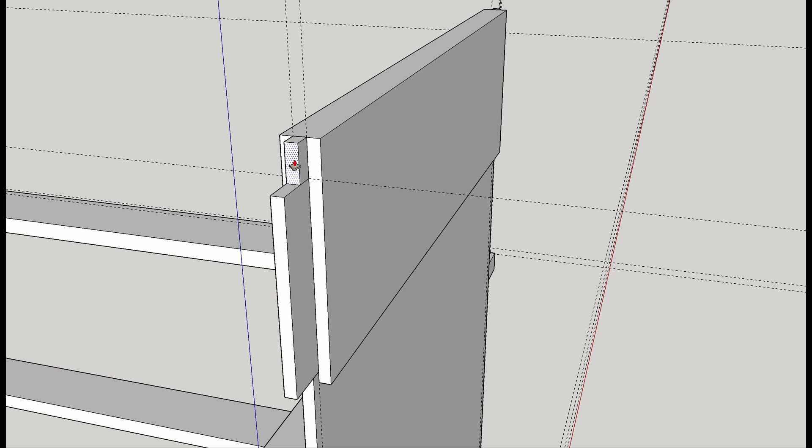That is one side, and we'll go ahead and draw the other side, which will come down 3/4 for the haunch. We'll draw our rectangles. Will come out 1/4, and will come out 1. Oop, miskeyed that one. It's bound. I got to do the long one first. All right, so that is how our rails will look.

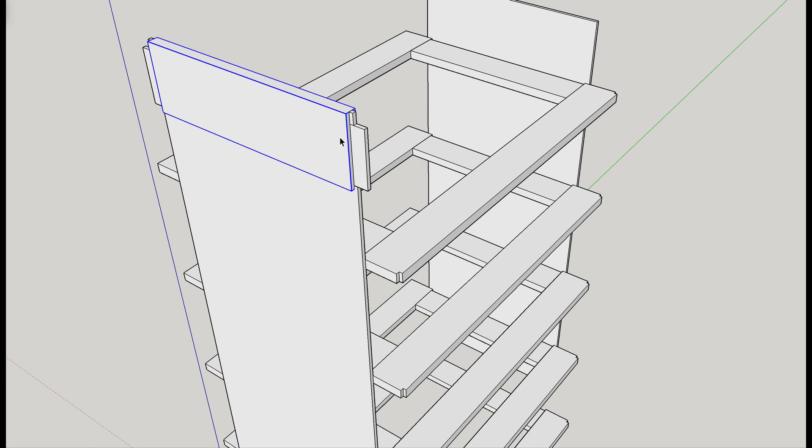Now, while the sides are hidden, we'll go ahead and copy these rails over. All right, we've got to copy the joinery on the rail over to the other rails. And at this point, it's easiest to simply take this one piece we've drawn and duplicate it across. And to do that, I will explode these components. Reason being is I'm going to take one element from one component and put it in another. To do that, we'll simply delete these other rails. And this rail is a carbon copy. Though it did not take the joinery. We can fix that. There we go.

And I'm going to simply move this rail over. So move, option to copy, and I want it on the plane. And now we'll take this one here and move it down, but we'll take it from the top. Actually, we'll take it from the bottom because we're going to line it up with the bottom of the stretcher. So move, option to copy, take the corner, I just take the face. And we got it in the wrong position, but that's okay. We'll move it back.

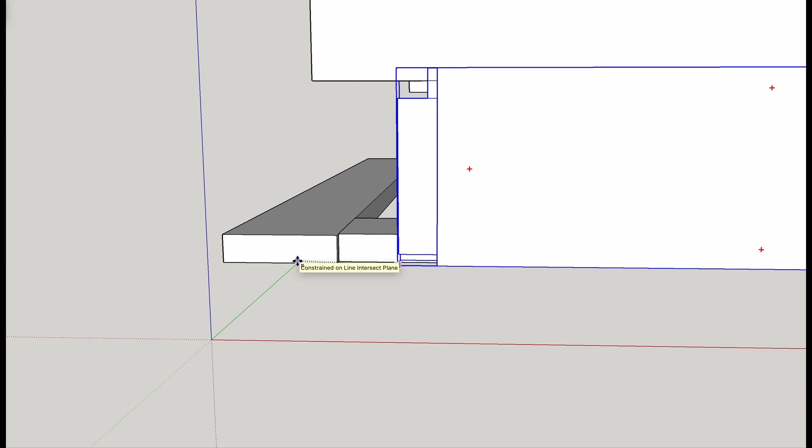Now this one needs to be rotated because we've got our dado on the bottom and we have our haunch in the top, and it needs to be in the bottom. So we can take it and go 180 degrees. So that gives us exactly what we're looking for. And with that one correctly done, we can move, option to copy. And I'm going to take it to the outside face. And I'm going to constrain it to the green axis.

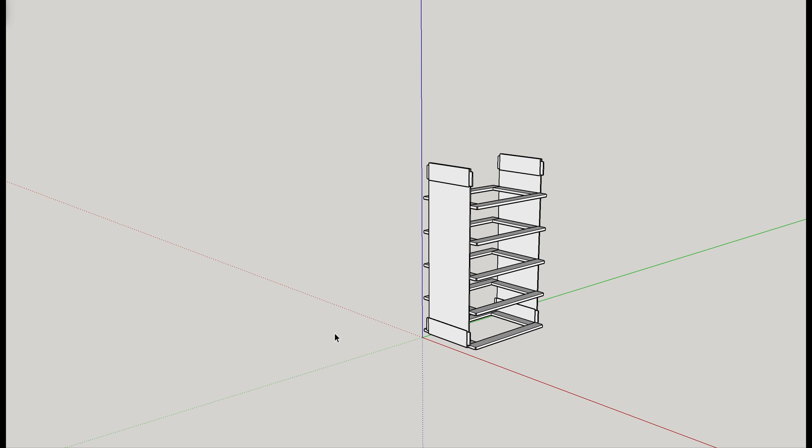We'll show our hidden items and turn back on our stiles. Be sure we got everything the way it needs to be. And this one needs to come over. Oh, stop that. Check the top, he's good. That was what we drew from. Let's check the bottom. Now he's good.

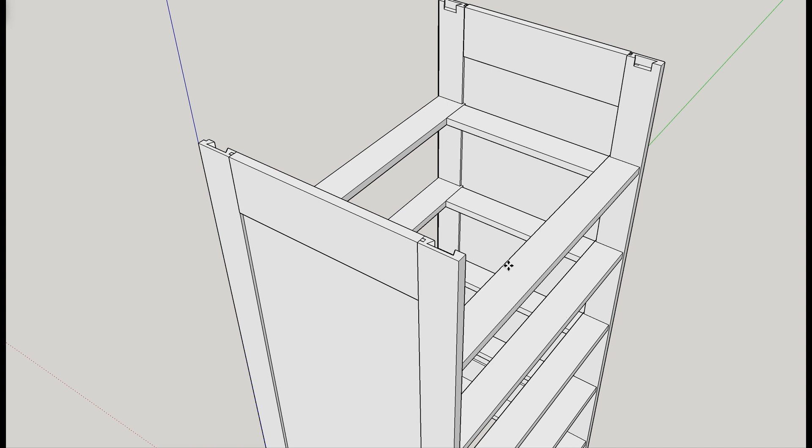So the last step in the haunched mortise and tenon is to extrude that tenon to create a mortise into the stiles. Now you could do it the way I've done the others and trace the geometry, do a series of push-pulls to make the cut. But in the interest of time, in this case, I'm going to go ahead and use a tool. It's called Bool Tools, and I'll show you how it works. So I'm going to basically do a trim, and I will select the part to be cut, and then the cutter.

Not a valid solid. Yeah, don't know why it said it's not a valid solid. Let's see if we got a cut. We can do that by hiding. You can see we have a 1-inch tenon. The 1/4 was already there for the haunch, and then you have 1 inch that rides just on top of where the stile or the panel abuts. So that worked just fine.

Now we'll cut the other side, and then we'll just cut them all since we know we've got the right tool. So view hidden items, unhide, trim again, part to be cut, the part that's doing the cutting. Don't know why we're getting the error. I might have an open face somewhere. Part to be cut, part that's doing the cutting. Part to be cut, part that's doing the cutting.

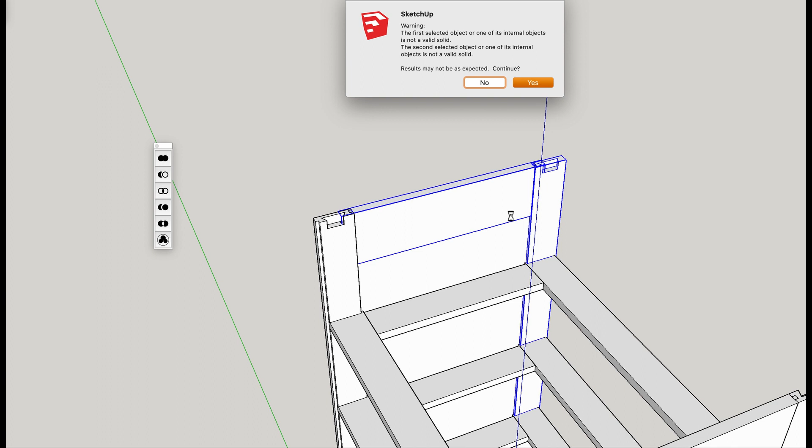And we'll come down and do the bottom. Part to be cut, part that's doing the cutting. Part to be cut, part that's doing the cutting. Again, again, again, again.

I don't know if we did the top up on this side or not. We'll hide it, come in and take a look. Yeah, we've got a cut in there. But the panel was a little high. We drew the panel just a tad bit too tall. And the mortise is not centered. Ah, that's why.

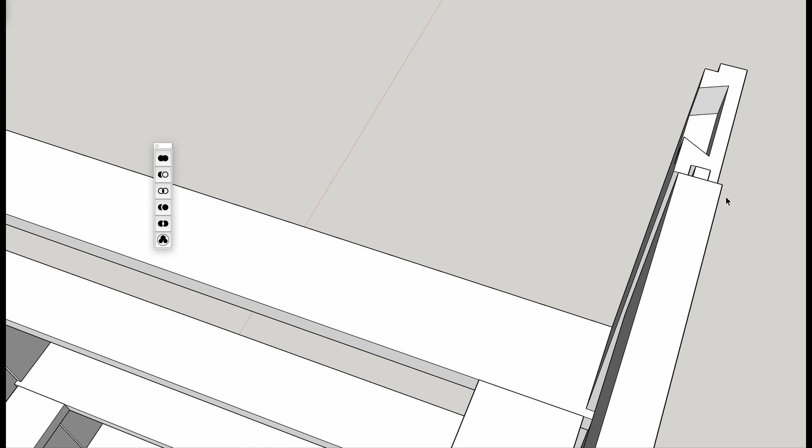There we go. Let's fix that. I didn't look at the top. There we go. And I undid the cuts. Let's double check the bottom before we cut it. He's good. He's good.

All right, so we'll redo our cuts. Trim, part to be cut, cutter. Part to be cut, cutter. Part to be cut, cutter. Part to be cut, cutter. And I believe that's all of it. So we'll turn on everything.

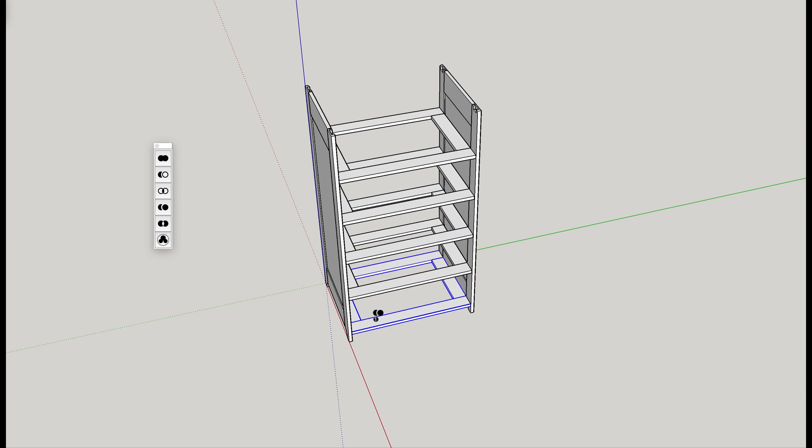Now there's one area of joinery we're done with Bool Tools that we didn't draw, and that is for your dust webs, drawer webs. Historically they'd be a mortise and tenon, but in modern days you would join this with a biscuit or a domino or some sort of other structure. It's not a structural joint.

This edge is holding the carcass together, as well as this edge. There's no stresses on this particular piece, so a biscuit or domino would be fine here. So if I were building this, I would not do mortise and tenon joints there. I would just do some sort of off-the-shelf joinery. Let's go ahead and show everything now.

And I forgot the top dust web. All right, so there is our cabinet, our chest of drawers. Let's verify that we do indeed have all of the joinery that we talked about. We've got our mortises and tenons in the top. We have our horizontal dovetail on the top drawer web. We have our stop dado for our drawer web. We have our non-stop dado on the back.

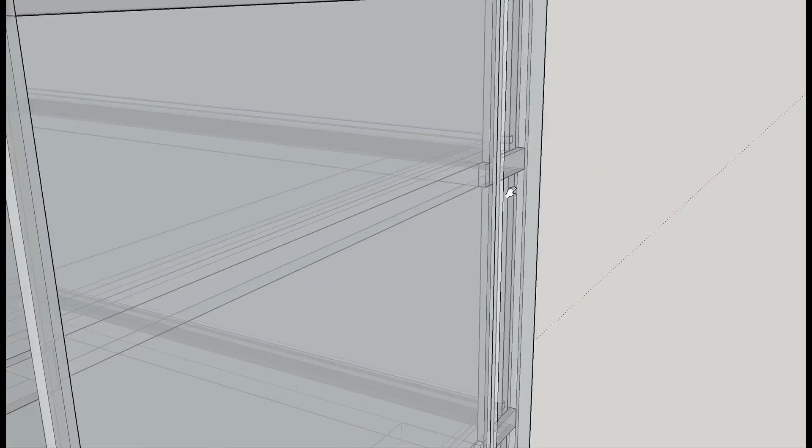And you can see we also have our slot for the panel. Get an idea of how the joinery all comes together down here. We've got our stop dado coming in and stopping right at the same point that we have our haunch tenon. Haunch tenon then comes up into a larger tenon. Fits very nicely. I'll turn off X-ray mode, and that's probably where we should stop in the interest of brevity.

Would I draw the joinery in a piece I was designing? I think I touched on this before. No, unless it was really complex. Typically, if I'm cutting the rails for frame and panel construction, I know in my head I'm going to do a 1-inch tenon, so I'll cut the pieces 2 inches longer than the plan, and then when I get to the piece I'll evaluate, oh, I need to do a haunch tenon here because a full tenon will make the piece weak. Most of those decisions you can make once you've made a piece or two.

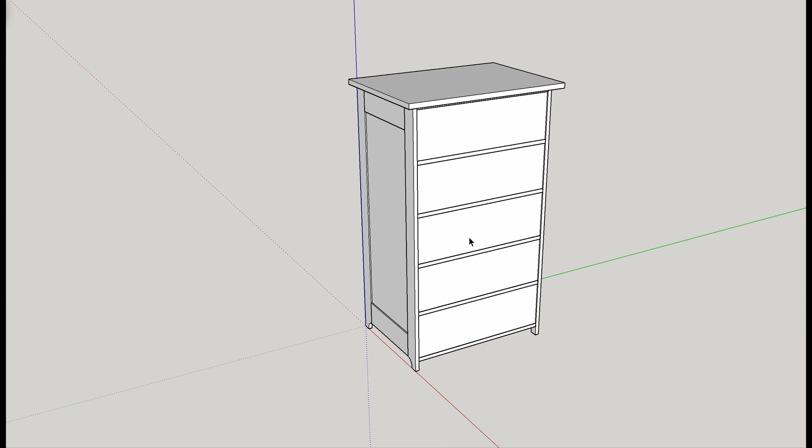Again, I certainly wouldn't draw the stopped dados or the through dovetails in the drawer webs. You simply know that there's got to be some sort of joinery. I've only got a 1/4 inch space between the inside of the panel and the rest of the carcass, so it can only be a 1/4 inch. Most of those you make while you're in the shop. But either way, I wanted to show you how you can use SketchUp to design a piece of furniture completely with every cut, every joint, every process.